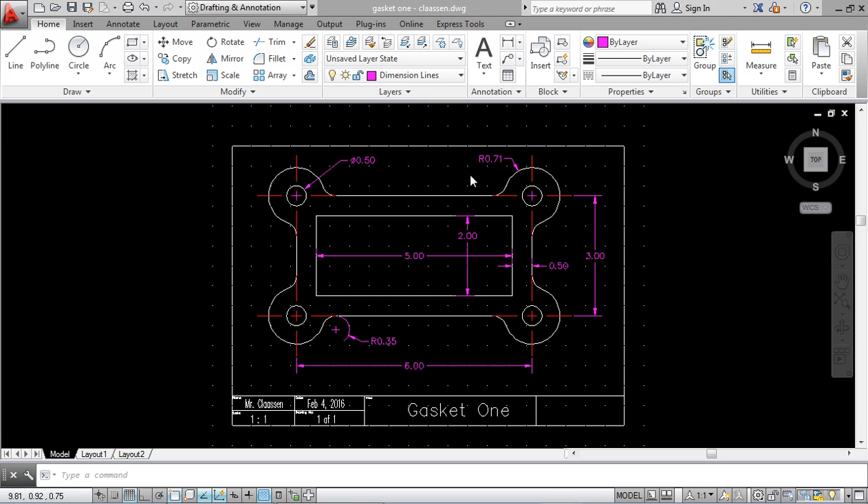To start with, I'm going to turn off some layers. I'm going to turn off my dimension layer, which is currently my current layer, turn off my center lines, and turn off my border. So all I'm left with now is the actual object, or gasket.

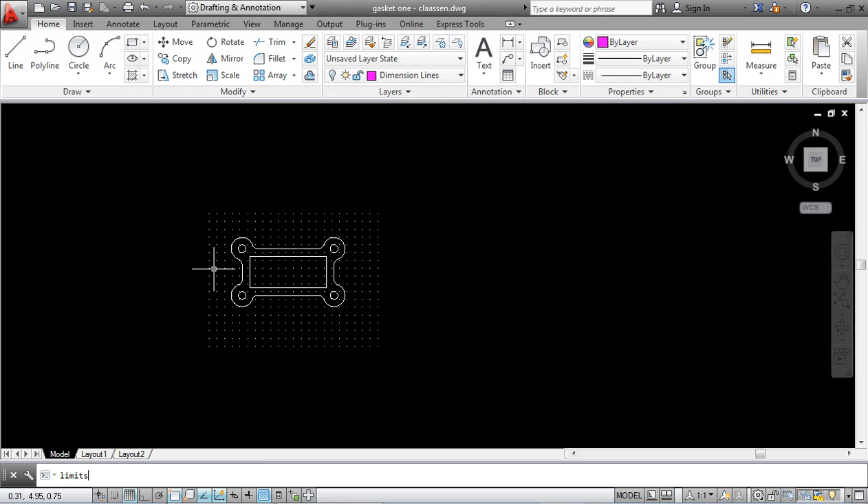Next, I'm going to change my limits to match the laser engraver. I type in limits, the lower corner is 0,0. The upper corner is going to be 24,12, which is the bed of the laser. When I hit enter, you can see the limits change.

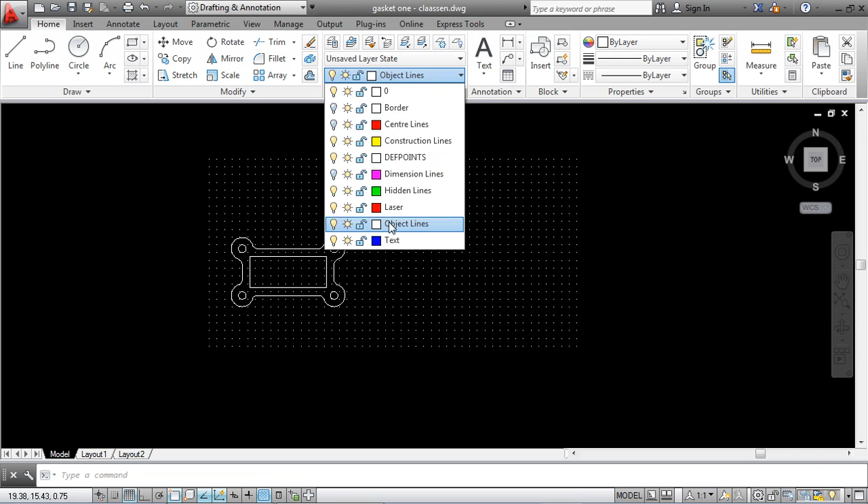The last thing, which is really simple, is I'm going to highlight my object and go to the different layer called laser that we set up. And therefore it's all done. Let me try that once more. We go up to laser, and there we go. I'm just going to hit enter, hit escape, sorry, there we go.

So now, all that really means is I've changed up here to the color red, and under my lines I've gone to 0.05. So if I don't have a laser layer, I can just change that one to red, this to 0.05, and there's my object done.

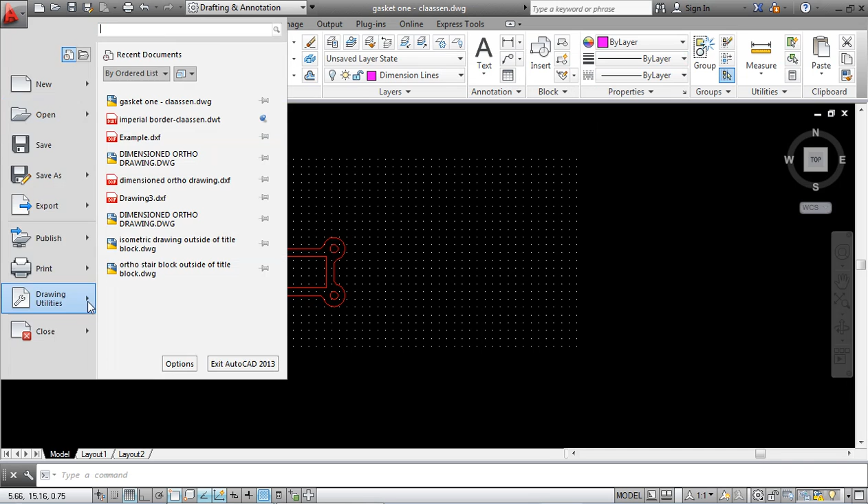Next, I'm just going to go to the application menu, go to print. From print, I'm going to select my laser engraver, which in this case is the VLS 3.50. Use the default paper size. Yes we do, because that's 24 by 12.

Under here, plot area, we want to plot the limits. Plot to scale, no, we want to plot 1 to 1, otherwise the object is not exactly the size that we want it to come out as.

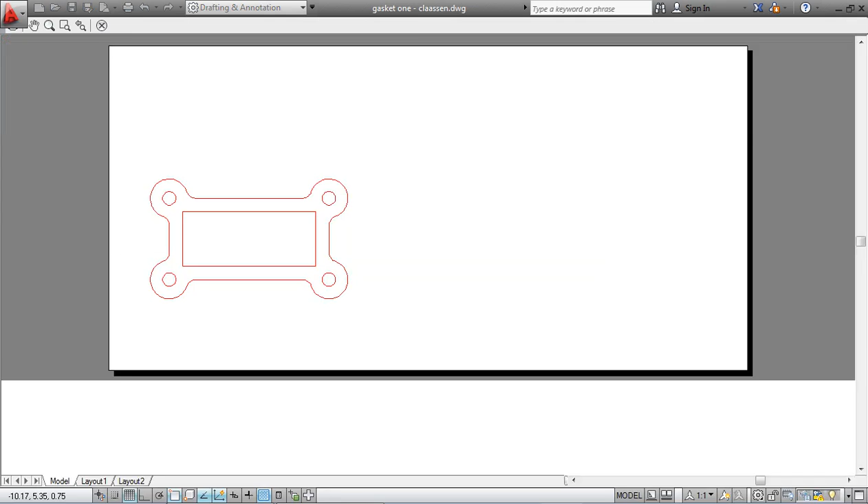When I hit preview, it should now be on the screen. Okay, we'll close this off. And finally, we just click on OK, and out it plots. It's not plotting to a printer right now, it's just plotting to another piece of software.

That piece of software is called Universal Laser Systems, and I'm starting it up here. Now you can see the object has come into this software.

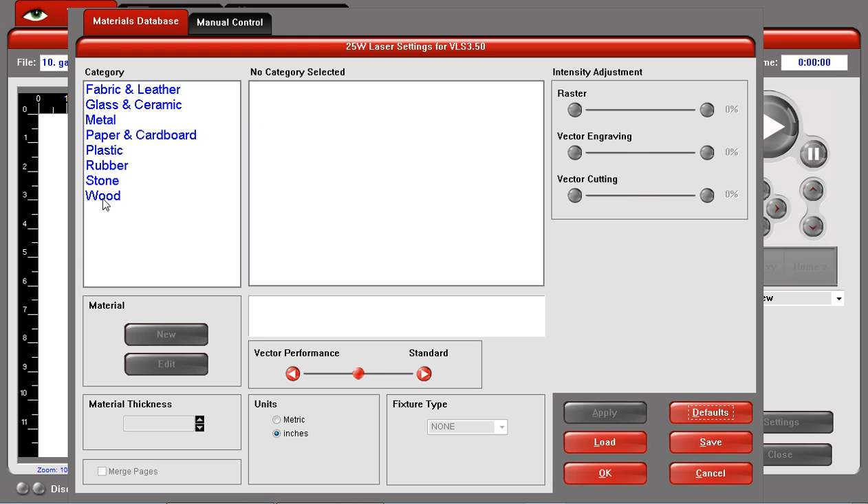Basically what you have to do here is set up some parameters, and we simply go to settings. Under settings there's all different sorts of things here, rubbers and stones, woods that we can go to. I'm going to click on paper, and in this case it is just paper.

Now what I've got to do here is I could hit apply, but what I want to do is show you under manual control what's just happened. Under this manual control there's 3 different colors set up. Black is for what's called engraving.

So if you're going to put text or something on, you're going to engrave it. Blue is just another layer for engraving. The color red is the important one because it's the one that actually cuts out stuff. You can see that it's changed the power settings, and depending on what the paper is or the material is, these ones will change.

So if I click on here, I can change my power to maybe 50%. I can change my speed here as how fast the laser is traveling. I'm going to leave it at about 75 because I know that this setting works. And the PPI is called pulses per inch, so how many times the laser hits the paper as it cuts it. I'm going to leave that one at 1,000.

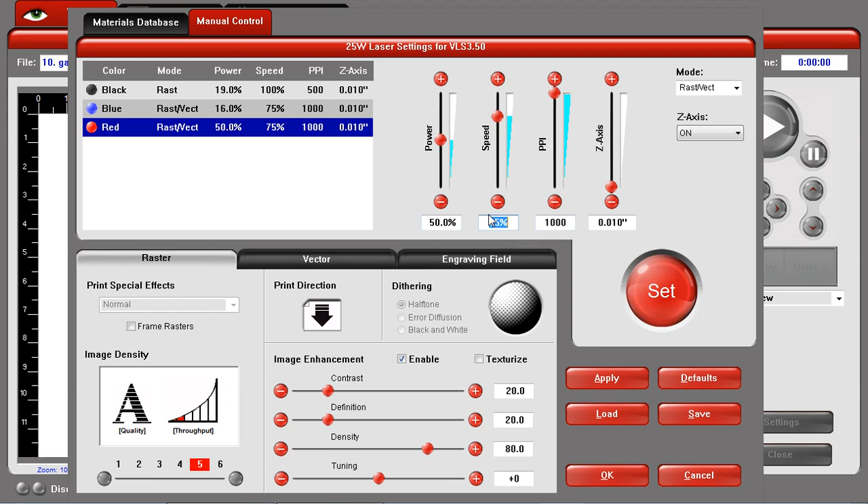Then all I do is click on set. This setting here, depending on what I'm cutting, I could probably even get away with a speed of 100%, and it'll still cut, right? If you go too low, it'll probably start the paper on fire. So I'm going to click on OK.

Now that is as far as I can go because I'm not connected to the laser. But if there was a laser connected, we would hit the start button right here and it would turn on, and this would turn green, and you would just press go, right? The green button for starting, and you would be cutting out right now. And that is in the next tutorial.